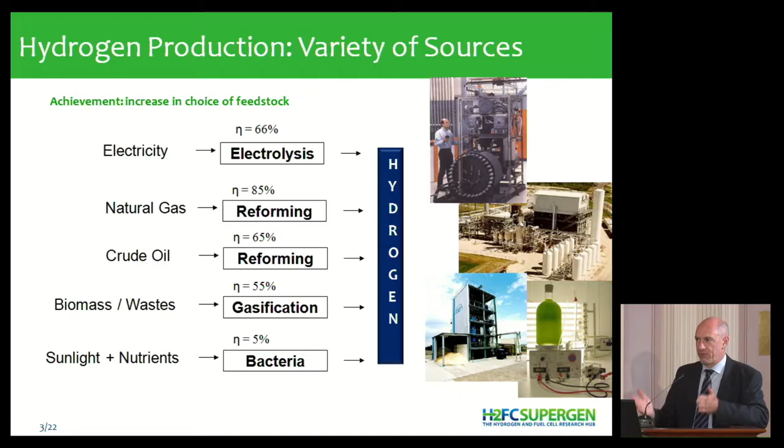And then we also have photocatalytic hydrogen production, which is the least efficient and also has a long way to go. The message here is we have a large choice of sources. We're not just building on crude oil. Transport fuels, 85% import of just crude oil. And it's a very focused market. It's very dependent on very few countries which supply this crude oil.

Similar, as was presented with natural gas, we're getting more and more dependent, especially because now in Europe we don't have the natural gas from Holland and from Scotland, or not as much anymore. And we're getting more and more dependent on imports. So hydrogen is one way of kind of broadening up. So this is the element of security.

You have more choice. And a lot of these energy sources, like if you take renewable electricity, is indigenous. It's produced in the country. You don't have to import it. And if you don't have to import something, you don't have to shift your GDP outside of the country. You don't have to take the income you generate in the country and pay somebody outside of the country. So you're not shoveling your money outside of the country. So you're keeping it within, you're developing your own economy. So there's a number of advantages for using renewable energies.

So adopting hydrogen increases energy diversity. You have different pathways of producing hydrogen. You have different sources you can use. In doing so, normally you invest into a process or into conversion equipment. You have no price volatility. So if you buy a photovoltaic array today, you pay now, and the price will never change. And you'll have electricity at a given price for 20 years. There's no price volatility at all.

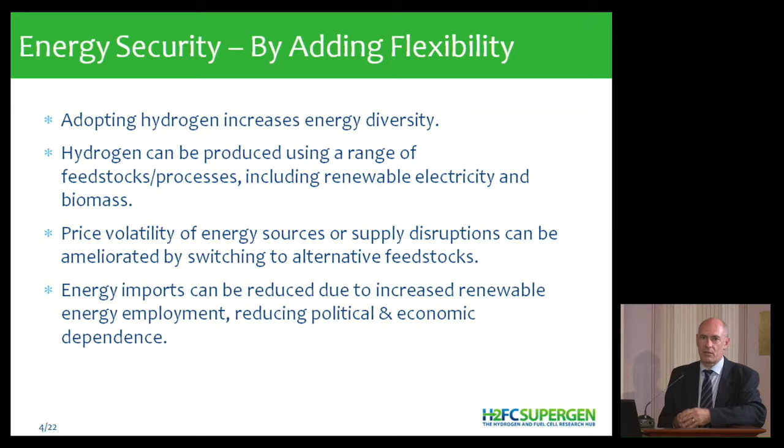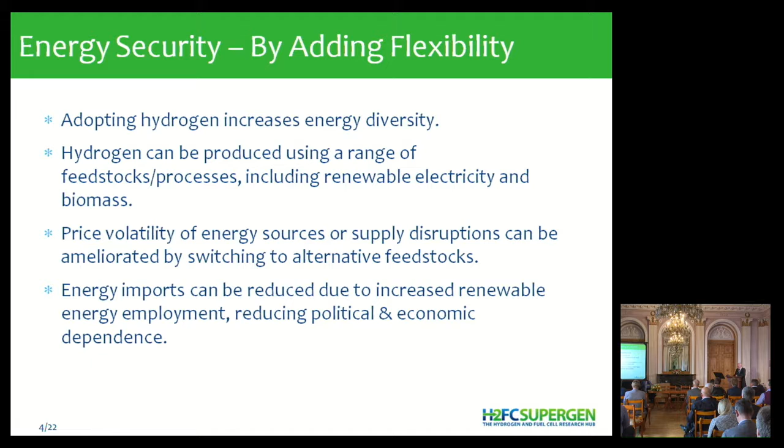And something similar applies here. So the renewable electricity will be going down in price, but it won't be going up. And you have very secure investment conditions. So that's something banks will like. So once they buy into these ideas, as they did after a while for wind and photovoltaic projects, which you can always get financed with a bank today, after they learned it, so it took a couple of years, 10 years, similar things will happen here. Because there's no volatility, there's no risk. There's no risk of whatever interruption to oil supply because there's a war in Iraq. And of course also political dependency is reduced.

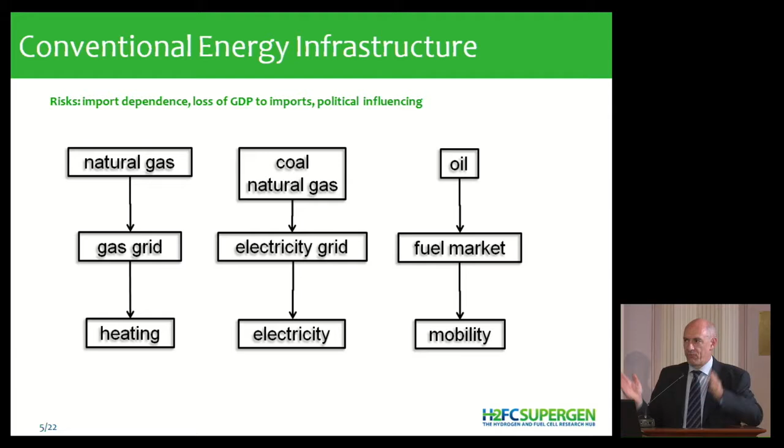And what happens is this. So now we have three distinct markets: natural gas, which is essentially heating, some also electricity. We have the electricity, which is coal-fired, nuclear, gas. And we have oil, which goes into the transport markets. It's very separate, distinct markets, different fuels. And in future, it could look like this. So we can shift from the electricity market into the transport market, into the heating market. We can shift from different sources into different applications.

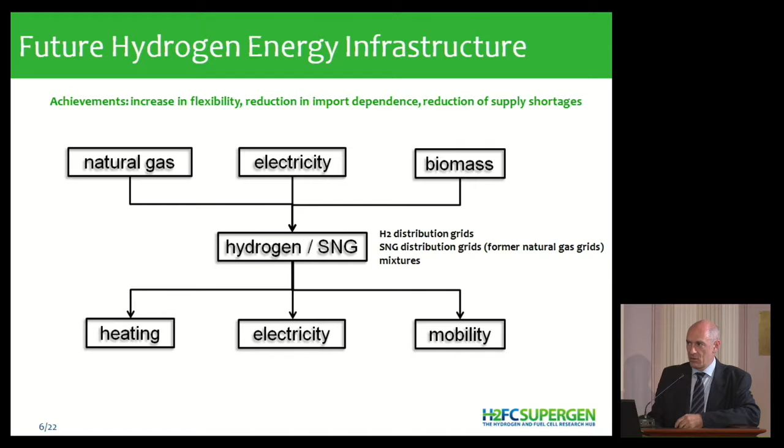So heating can come from biomass. So biomass would be converted into gas, whether it's hydrogen or methane, doesn't matter. Can also work on synthetic natural gas. We don't have to work on hydrogen. We can use the same distribution grid, the same storage, whatever. It's completely compatible, but you see it's all interconnected. And once it's interconnected, you can shift from one market to the other. You can use price differences. Transport fuel is the most expensive, so there'd be a massive impetus from renewable electricity, which is getting dirt cheap, just producing transport fuels. And that's one thing hydrogen can deliver. You can't deliver this with oil or natural gas.

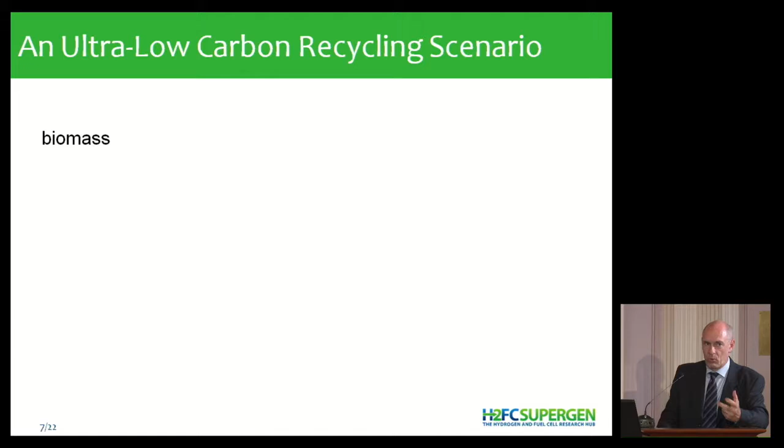Now, just to show you a little of our thinking in our group in Birmingham, so we've come up with this. So we want to use biomass as a source, so biomass waste, as I said, because it's carbon neutral. We can put that into anaerobic digestion and it produces biogas, which is mostly 65–70% methane, the rest is carbon dioxide. You could clean that up if you wanted and feed that into the natural gas grid as pure methane. So essentially you're even improving the quality of the gas.

The part you can't digest because it's not proteins and fats, because it's celluloses, for instance, you'd have to gasify. So you produce a syngas, which is a mixture of hydrogen and carbon monoxide. So this syngas you can methanate and then also feed into the natural gas grid. So essentially you're turning biomass, as a carbon neutral source and a solid source, which you can also store and all these things, into a gas which is easily transported, fits into the natural gas grid we have already, all the infrastructure most of Europe has.

Now this natural gas we can use in SOFCs, solid oxide fuel cells, also producing. Very high efficiency because part of the heat that is produced in the process we can recycle to upgrade the fuel quality. So essentially we use it for reforming, internal reforming, and we produce electricity and heat at efficiencies somewhere between 60 and 70% delivered to the grid. So unbeatable by any other device.

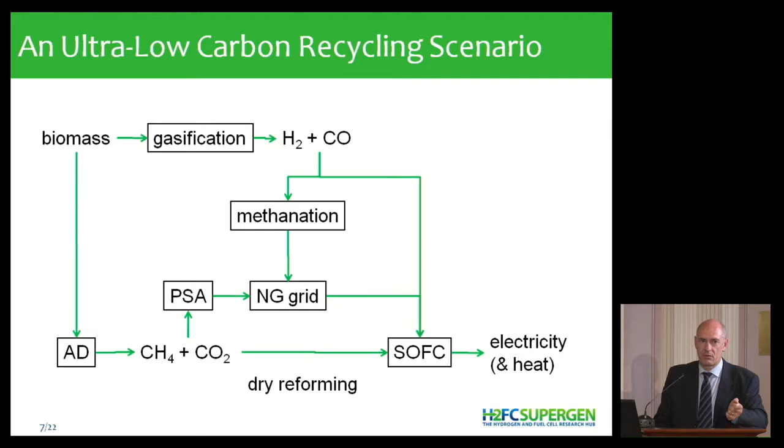And in theory, not always in practice, because there's some technical susceptibilities here, you could switch an SOC from methane to hydrogen and back again. It would work. It doesn't really mind. There's some issues about heat removal, but whatever.

And then we found in the last years that this SOC, we can just turn around. We can use it as an electrolyzer. So the same device will either turn hydrogen into electricity and heat, or with some heat added, turn water back into hydrogen. It's the same device. And we're just working on doing that with co-electrolysis.

And in the end, you have a zero carbon system, or effectively zero carbon. You would be releasing the carbon dioxide to the atmosphere. So you're using the atmosphere as a storage. You release water and carbon dioxide to the atmosphere and take it back again.

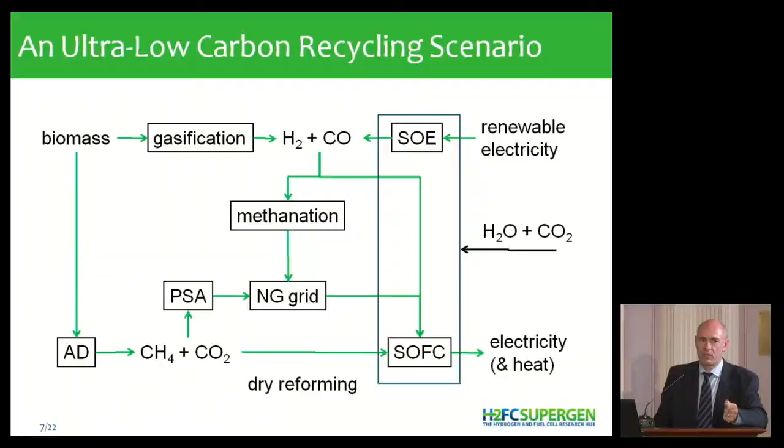And then in future you wouldn't do that. You would be recycling the CO2. You'd have a closed loop for CO2. You'd have an infrastructure for CO2. You wouldn't release it to the atmosphere anymore. And the biomass would be perpetually capturing it. So essentially you have a much better system than you'd ever get with any carbon capture and sequestration.

So the solid oxide fuel cell is essential in this because it has the flexibility of the fuels, it has the very high efficiency, and it can be reversed. You can't do that with a low temperature fuel cell. Theoretically you can, but not technically. And in this case you can technically do that. And you're not even getting disadvantages, you're getting advantages. So the aging, the degradation of the fuel cell will get better if you reverse it, which is quite surprising.

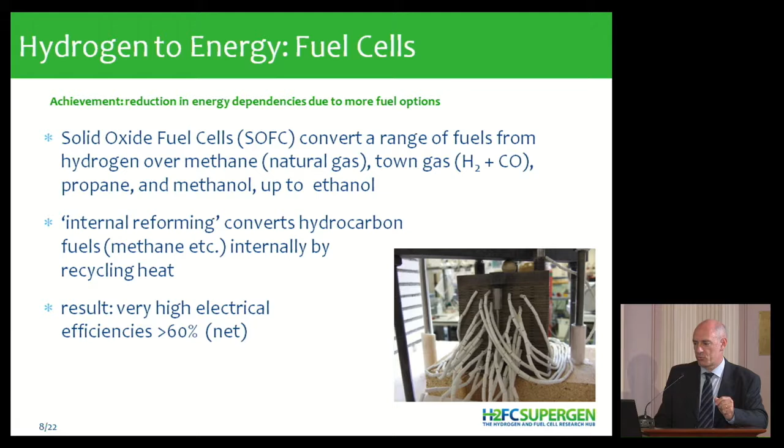So, what else? There's a number of other things you can do with a fuel cell you can't do otherwise. That's why we call it enabling technology. Like the Toyota Mirai has a socket, and you can actually plug your house into the vehicle. You can't do that in Europe because the standard is different, but in Japan you can do that.

Or, not exactly a Mirai, but imagine you'd have a similar vehicle, you're a craftsman, you go to a building site, you don't have an energy supply, you just plug your tools into your vehicle. And you have a supply of 220 volts AC energy on your building site, which you otherwise have to pay a lot of money for.

So there's a large number of things you can do with this energy supply unit, whether it's packaged as a car or whatever, or something you carry around, which you can't do with other things. Or you'd have a noisy Honda 3-5 kilowatt engine running, which breaks down all the time because it's not built for continuous operation.

So it gives you the possibility to do things. So you could also build a backup from the vehicle. I'll get into that in a moment. You have this linking of the electricity grid and the gas grid, so you have all these possibilities of shifting around. And with a fuel cell, whatever size you build it, you could also supply portable power.

So you could actually go on a sailing trip for 2 weeks. You take 5-10 liters of methanol along, and you have a fuel cell supplying your laptop and whatever with electricity all the time. And otherwise you'd have to have an engine running, you'd have to take along petrol, all the smell, all the stuff. And with a fuel cell you can get this much cheaper, much lighter, and with no noise and no disturbance, no emissions.

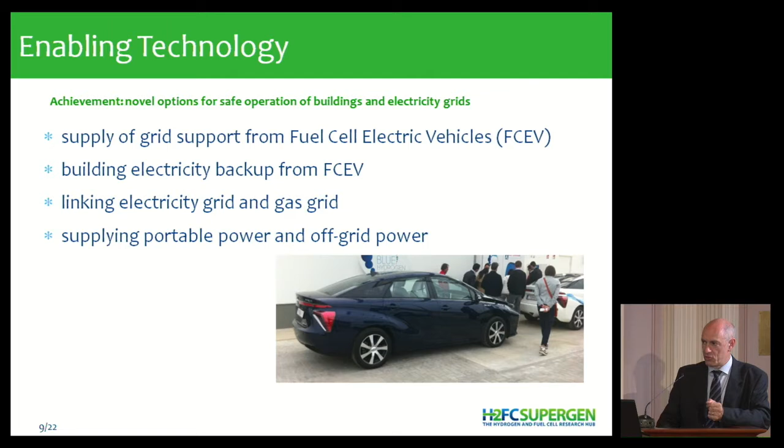So this again about the reversibility. That was the initial thing, so Schönbein and Grove, essentially they start with electrolysis, that was the first thing. So once Volta had invented the battery, you had a source of voltage. Someone stuck the two electrodes into a pot of water, something. You saw something bubbling. That's how hydrogen and oxygen were identified as gases.

And Schönbein somehow got this idea this should be reversible, and then they actually managed to build this as a reversible cell. So it's been known for ages, but we've only started, I think, 10 years ago of actually doing this technically. And you can do it with a low temperature fuel cell, as I said, but it doesn't really last very long, and a high temperature fuel cell you can actually run for years, I think now. So that's quite unique, and it's essentially also unique for the high temperature fuel cells.

Just as an aside, you could turn 100% of the electricity you put into a high temperature electrolysis into 100% hydrogen. The lie behind that is you have to supply heat, so you're not accounting for the heat. So you just say, oh, I have some sort of high temperature heat source. Okay, could be a solar receiver. Essentially, you could have a solar trough, you just need steam, 200 degrees centigrade steam, and then you can actually turn all of the electricity into hydrogen. So very close to 100%.

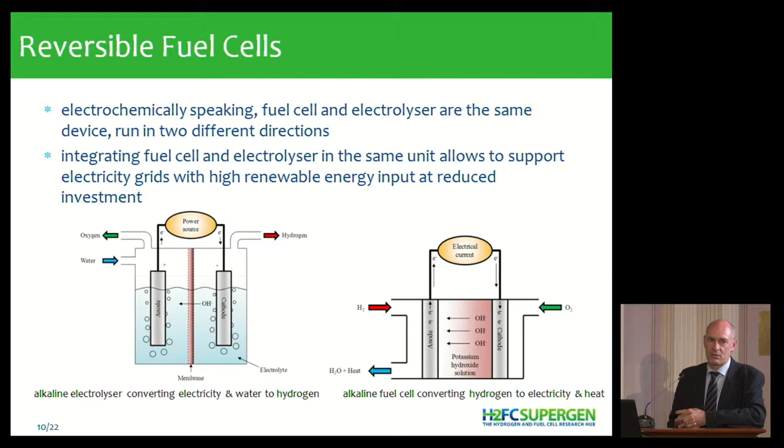If you then have a 70% efficiency electricity production, you'd have a round-trip efficiency of 70%, which gets close to a hydro scheme already. And you can't do that with anything else.

Now, the other element, that's distributed systems. A fuel cell, if you think of micro CHP, will be a distributed system. So you'll have a small fuel cell system sitting in all kinds of houses. What we have today is a centralized system. We have the large power plants, which mostly sit where the fuel is. So today, coal-fired power plants sit on the coast because all the coal comes from Australia. They used to sit where the coal mines are. So that's shifted now.

Which, by the way, gives us the same problems as wind energy. So everybody in Germany complains. Wind energy sits on the coast. We have no grid there because nobody ever bothered to build it. Now the coal-fired power station sits on the coast, and they have to build the grid, and nobody's complaining about that. But they complain about the wind grid.

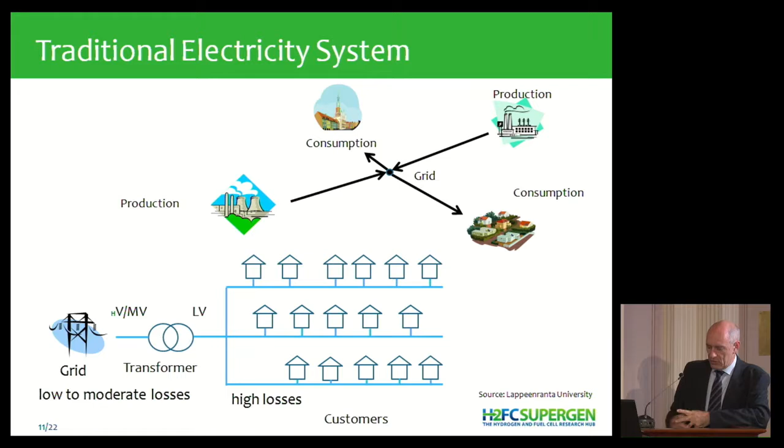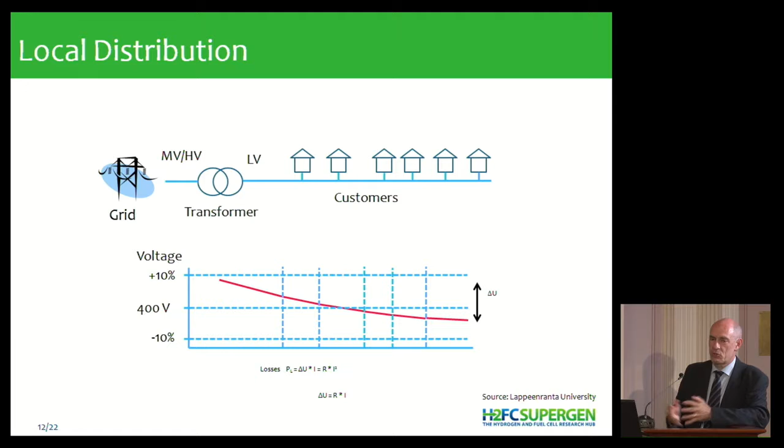What also happens, the longer the line on the low voltage side, the more voltage drop we have. Now, once photovoltaic comes in, photovoltaic will also always be distributed, so you have photovoltaic panels on the houses. What then happens is you have the feed-in from the right to the left. So the first thing that happens is you lift the voltage. So you're avoiding all these losses you have on the line, which is all ohmic losses, all heat. So you make the whole distribution system much more efficient with photovoltaics because you're using it much more sensibly. But the other thing is this.

Today we're turning from this top-down into something much more mixed, and it might even be bottom-up later. So this prosumer, producer and consumer at the same time. So this would be the conventional, and now we're feeding back. So either it's wind energy, which is also centralized, so you're feeding back at a higher level, but we're also feeding back from photovoltaics at a lower level, as I said just now, so you're bumping up the distribution grids.

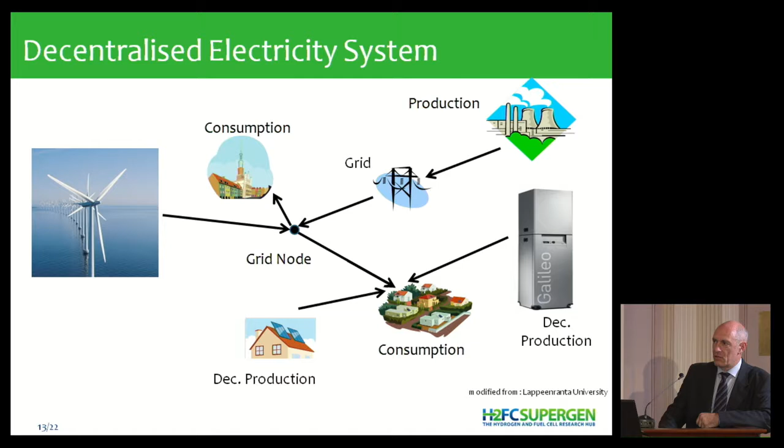And then we also have fuel cells in houses, micro CHP, and you can see here the direction turns round. We're feeding up into the grid from the lower grid. This also gives us the possibility to integrate storage. So lots of people, it's not quite sensible economically, but lots of people want their photovoltaic system with a storage, with a 5, 10 kilowatt hour battery. Costs a fortune at the moment, will be cheaper later.

But this means we have distributed storage all over the place. So every house has storage for 1 day of electricity, like 10 kilowatt hours. So if it has 20 kilowatt hours, it would last them two to 3 days. So inherently in the system, we have storage, so the network wouldn't even have to pay. And what's more, we have lots of inverters. So with photovoltaics and with fuel cells, we have to convert direct current to alternating current. So this inverter will have to know what 50 hertz is. So this inverter is getting a 50 hertz signal from the grid to synchronize with the grid.

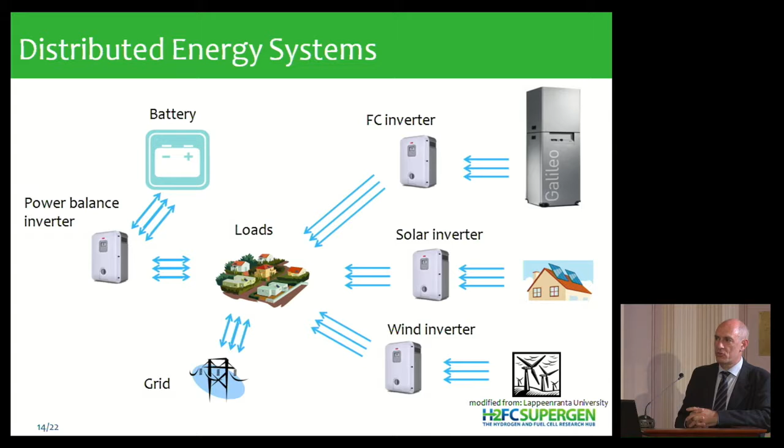Then you might know about active reactive power. Because we can shift the phase in these inverters freely, because it's electronics, we can also do grid services. So the whole grid becomes much more stable, because there's no question about phase shift or whatever. It can also all be done locally, and there's storage all over the place. So essentially this decentralized or distributed energy system is much more stable than it was before. It gets more complicated, so it's more complex, and it's more difficult to coordinate or manage, but inherently it's much more stable. So we have less transmission losses.

We can avoid building new lines because we're using the lines much more efficiently. We have higher reliability. I'll come back to that in a moment. You could have self-sufficiency, for instance, by having lots of photovoltaics and storage, but it gets much more complex. Could also get more expensive. And if you had lots of, say, combustion engine micro CHP, it will also get less efficient. With fuel cells, it gets more efficient, but you wouldn't be able to do this with lots of engines.

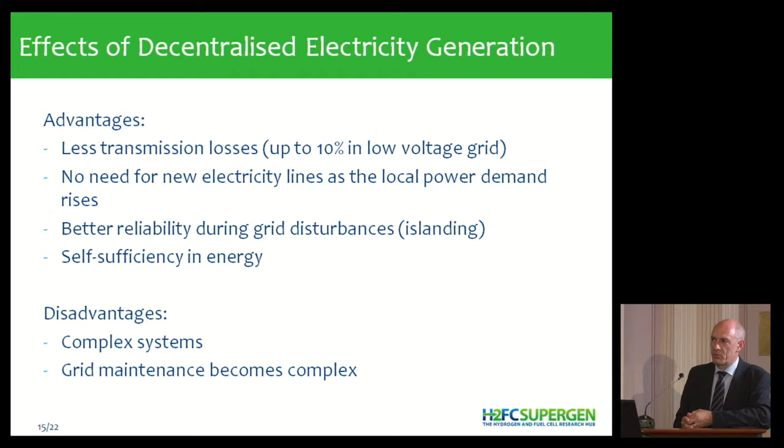So now what about the reliability? This is what we have now, and if we have any incident on the grid, off go the lights. So you have a whole area, so we were discussing yesterday, if you blow up the power station here and you blow up the line to Russia, I think, there's no electricity in Estonia. And if this was a distributed system, what you could do is you could just disconnect your house from the grid, switch on your fuel cell, and off you go. The only prerequisite is that you still have gas, which normally is the case.

So, of course, some of the gas grid will run on electricity. You need some sort of compressors, whatever. If those have a backup generator, you're fine. If you had a major earthquake, you might also have damaged the gas lines, but I don't think we have this here. But gas lines are easier to repair than electricity lines. And then you just switch on the light again.

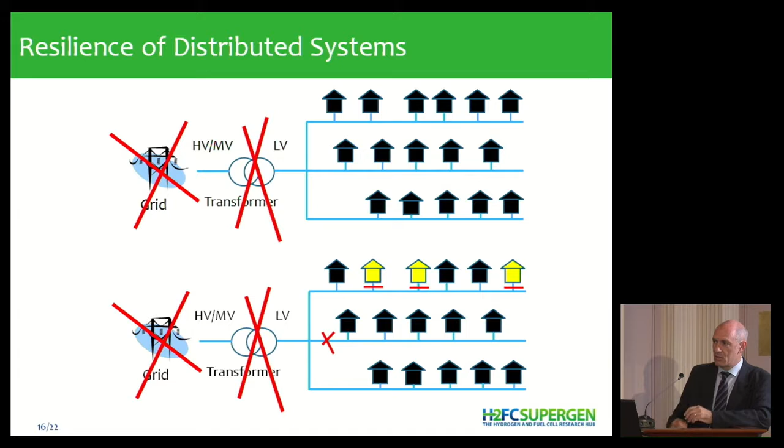The prerequisite is, as I said before, the inverter needs to know what 50 hertz is. So you need a 50 hertz signal, but then you put in a quartz clock, and once the grid comes back, you have to synchronize and off you go. It's all electronic. You could also disconnect a whole branch or parts of a branch.

So in case, say, there was a storm, Irma or whatever, that has taken out your electricity grid, you can build up the system again, at least to a certain level. So every hospital here, every government building, school, whatever, would be back online. And you can't do that with a centralized system.

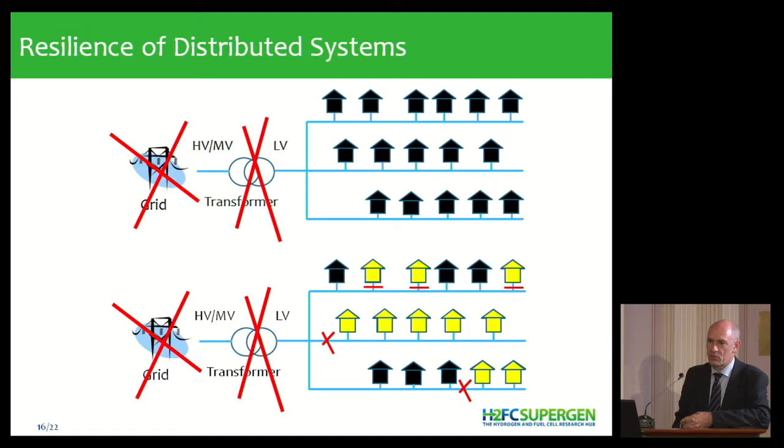It's just not possible. And essentially that's what all these companies who buy the Bloom systems are doing already. So Google, whatever, they don't want to go out of business when the California grid fails again. And they're all doing what you see at the bottom there.

So then it doesn't have to be a natural disaster, it could also be a cyber attack. So if I was somebody sitting, I don't know where, won't name anybody, and there's a nuclear power station sitting somewhere and I just want to play with it. Here's a gigawatt I can take out. It would just take me maybe a month to get through all the security. That's a clear-cut goal. Now, the same gigawatt I could have with 1 million 1 kilowatt residential systems.

Now, I can't imagine anybody wanting to take out 1 million systems. I mean, the time that will take. It's not a target. I mean, what's the point of taking out 1 kilowatt for one building? You want to take out the whole grid. And second, it's just a lot of work. It's a lot of number crunching.

So the probability this will happen is much lower. I mean, who cares about the heating in your building? You want to take out the national electricity grid. You wouldn't even be able to see whether you've been successful.

Of course, then comes the discussion that maybe the single houses aren't protected as well, and they all have the same shitty Windows 7 or 10 or whatever, and all the back doors everybody knows about, and have common software, of course. And that gets to be an issue if you have this Internet of Things. It will be an issue anyway. So there has to be some level of protection there.

But I'm still pretty sure that for somebody sitting, I don't know where, taking out a residential heating system will not have the attractiveness of taking out a nuclear power station, and you won't put the effort into that. So essentially, this small-scale distributed system is just safer. And you can't blow up 1 million residential heating systems. I mean, what's the point of that? You can blow up a nuclear power station or have a plane crash on it or whatever.

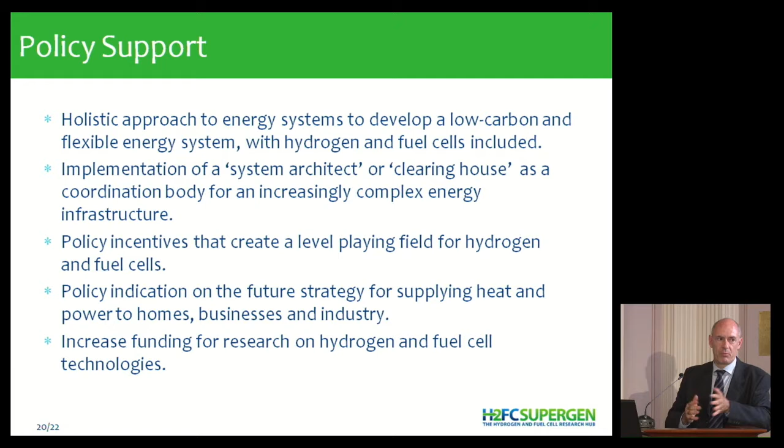So, just wrapping up. What can hydrogen fuel cells do? So they can increase the independence of Europe from fossil fuels by producing the energy we need ourselves, always building on increased efficiency. Increase the stability of the economy because we don't have to import our energy. We can keep the money in the EU and foster the EU economy with that money instead of fostering Saudi Arabia, whoever.

And we can create an energy system which is much more resilient, much more robust, which will not be impacted so much by natural disasters. With climate change, we will be seeing more severe storms and more frequent storms and harsher weather. And if the infrastructure is more resilient, not just because it's built in a different way, but also because it's more distributed, that will be a tremendous benefit.